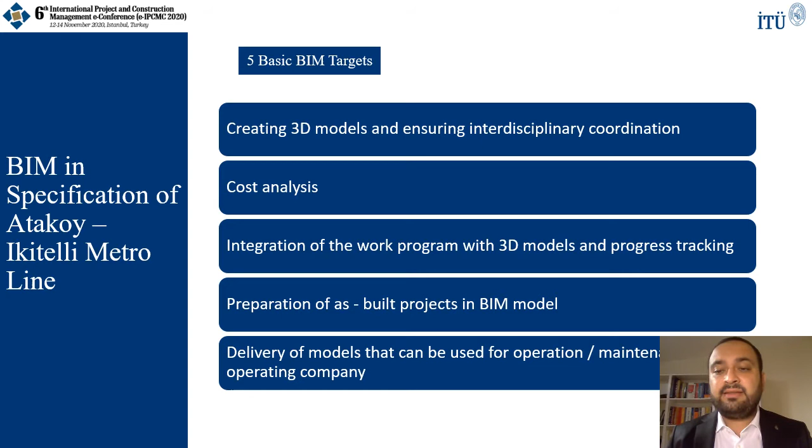The Atakoy-Ikitelli Metro Line has 5 main BIM targets: creating 3D models and ensuring interdisciplinary coordination; cost analysis; integration of the work program with 3D models and progress tracking; preparation of as-built projects in the BIM model; and delivery of a model that can be used for operation or maintenance to the operation company.

In the Atakoy-Ikitelli Metro Line BIM implementation plan, main BIM targets are planned at 3 priority levels. The high-level BIM usage target is defined as 3D coordination. The mid-level target is defined as phase planning, record modeling, model-based cost estimation, and two-dimensional layout production. The low-level target is defined as operation and maintenance studies.

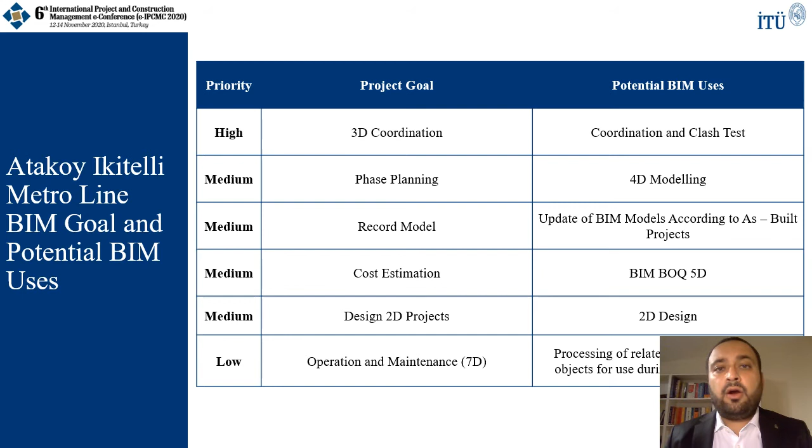Now let's look at the BIM application on the Atakoy-Ikitelli Metro Line. First, I want to explain the BIM coordination process. The 3D modeling and coordination process, specified as high targets in the BIM implementation plan, is carried out in cooperation with all stakeholders. In the coordination workflow, representatives from all disciplines of the employer, consultant, contractor, designer, and operation firm attend BIM coordination meetings held every 2 weeks.

3D models are shared a week before the meeting and examined by the employer, consultant, and operation firm. With the coordination model examined, each discipline's representative conveys comments to the contractor and designer. These comments concern not only clashes but also preventing problems during construction and operation. Each comment can be accessed by all disciplines and stakeholders, and the whole process is carried out transparently.

Within the scope of the line, a total of 1,009 comments were reported, and the vast majority of these problems were resolved during the design phase thanks to the BIM model.

Another significant point of the Atakoy-Ikitelli Metro Line BIM coordination process is as follows. Before the COVID-19 pandemic, coordination processes were carried out with Navisworks software. However, during the pandemic, BIM 360, a cloud-based software, was used to adapt to new working conditions. Thanks to this rapid adaptation, coordination efforts were able to continue throughout the COVID-19 pandemic.

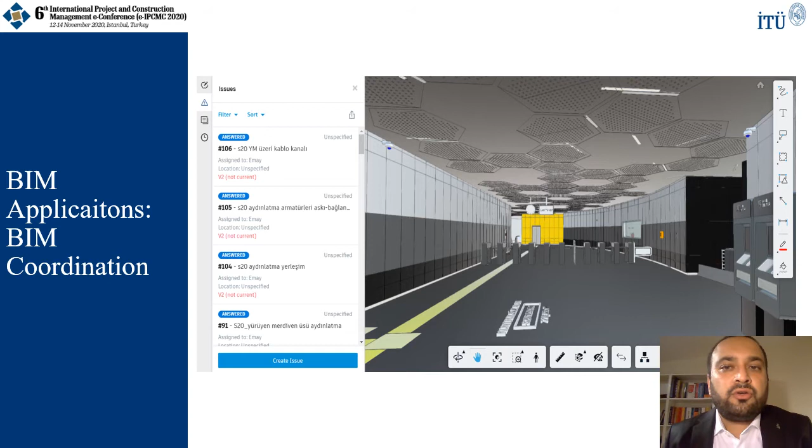One of the most critical features of the line is that the route passes through an irregular residential area with high building stock. An accurate examination of the interaction of the metro line, which passes through the most crowded areas in the city, with surrounding buildings is an important challenge for stakeholders.

To overcome this difficulty, laser scanning studies were conducted using drones, and point cloud data was integrated with station and tunnel models, allowing interaction with surrounding structures to be examined through current data.

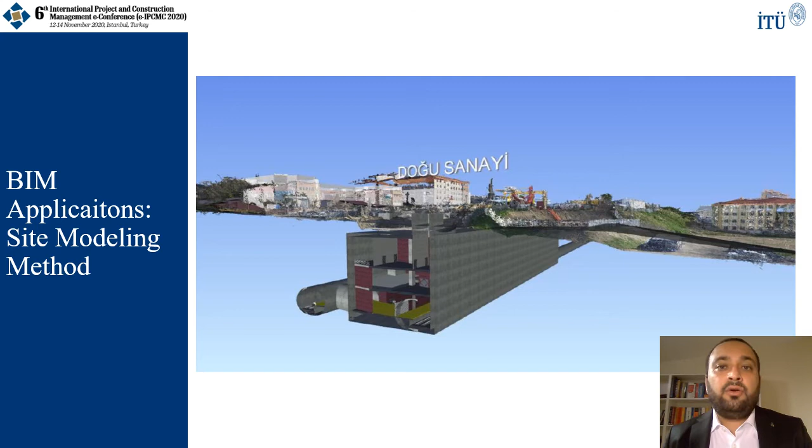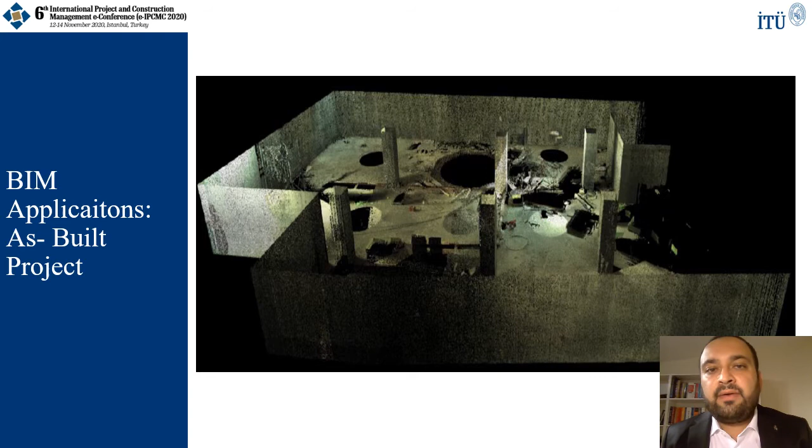The laser scanning method was not only used for site interaction but was also used to create as-built models of structures whose rough construction is finished. With these as-built models, an overlap test is performed again with electromechanical or architectural models. Clashes that cannot be detected during construction are largely prevented by performing clash tests with laser scanning data.

The progress tracking of tunnel, rough construction, and rail assembly of the line is carried out bi-weekly. Progress models for electromechanical and finishing works are carried out through more detailed models that are shared weekly.

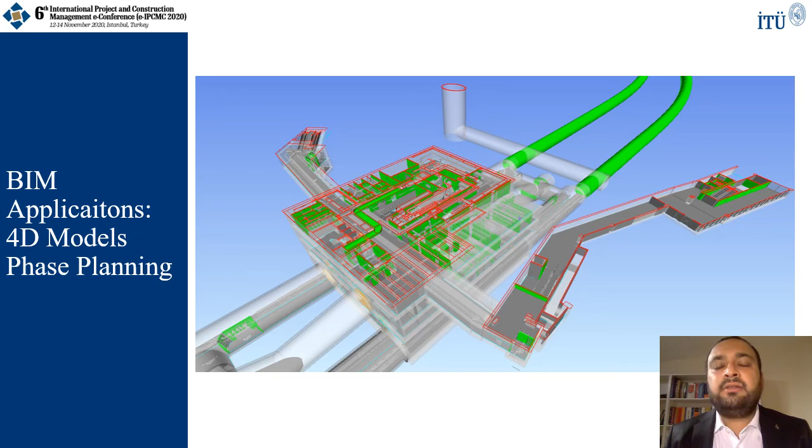These models, which are integrated with the schedule, provide making the delay analysis. Another study carried out within the scope of the line is the follow-up of cost analysis and progress payment through the 3D models in this study.

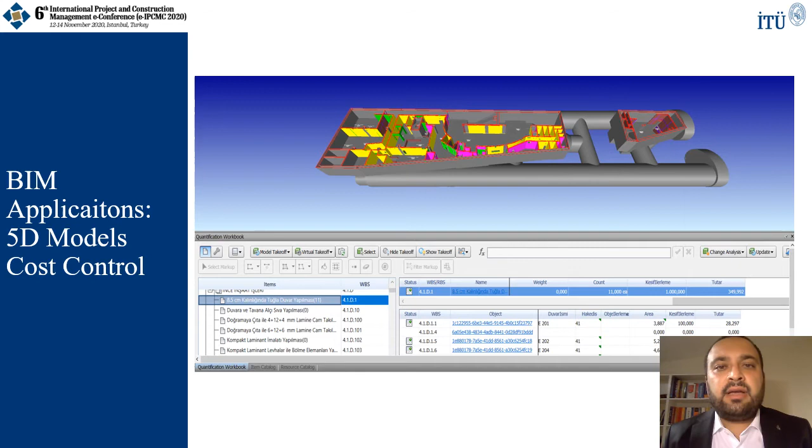Firstly, the unit price descriptions defined in the contract have been defined in Navisworks quantification model with all the details. In each manufacturing item, the model elements that are the basis of that production are integrated, and then, as the construction takes place, the progress parameter is filled and cost calculations are made. The prepared models are updated monthly and shared with the employer.

Studies to create 7D models, which are defined as low targets in the BIM implementation plan, are carried out through the signaling documents, which are very important, especially in testing and commissioning works. With the signalization models created, all documents that may be required for operation, maintenance and repair are linked to related equipment, and accessibility is provided.

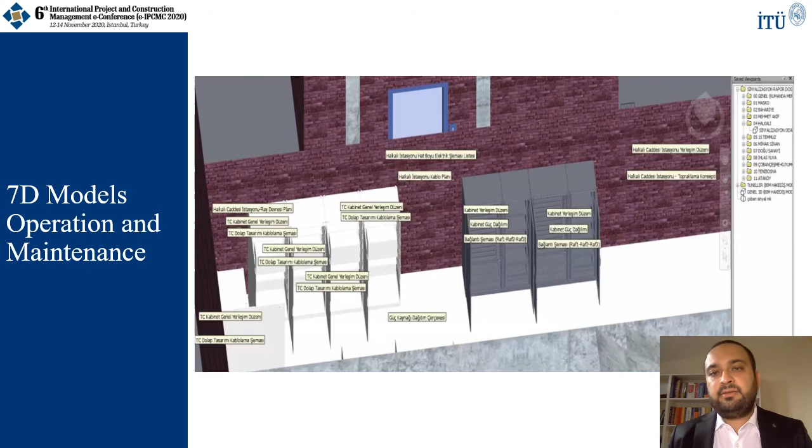Let's look at the outcomes of this case study. Firstly, the fact that the stakeholders did not have sufficient BIM experience at the beginning of the projects, and the transition of IMM to BIM without creating a corporate culture, wasted a lot of time in the designing BIM process. IMM should prevent the loss of time caused by inexperienced contractors by creating standards documents.

Thirdly, during the COVID-19 pandemic period, BIM played an important role in the continuation of design and coordination process. The transfer and dissemination of this experience is important for the industry.

Another outcome is the importance of cumulative experience. The experience gained from the coordination process should be transferred to other projects. This experience will be instructive not only for new jobs, but also for new graduate engineers.